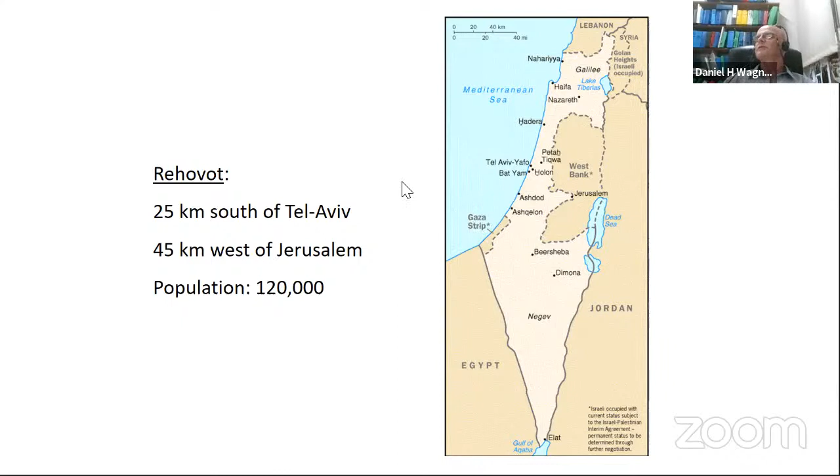The size of Israel is not very long. From Eilat at the extreme south to Nahariya at the north is a little less than 500 kilometers. And from the sea, where the Gaza Strip is, and the Dead Sea, so that's the Mediterranean Sea, there is about 100 kilometers. So we are very small. Sorry.

At the Weizmann, we have 5 faculties: math and physics, chemistry, and 2 faculties of biology, actually biochemistry and biology. And we have a science education institute as well. We are a small institute, 2,700. We are much smaller than the big universities in Israel. We are a research institute, and we don't have undergrads.

We have 250 professors, 600 engineers and technical staff, 1,200 students, among them close to 180 Indian students, actually. We have a big Indian population and also a big Chinese population. And as I said, we have only master and PhD. We don't have undergrads. 220 postdocs and 400 administrative employees. So that comes up to a total of slightly less than 3,000 people.

We are the only academic institution in Israel where everything is done in English. And the reason is, well, there are a few reasons, but we have many students and postdocs from abroad. And also English is the international language of science. So it's very convenient. The institute was founded in 1934. There were very few buildings, and we have grown quite extensively these days.

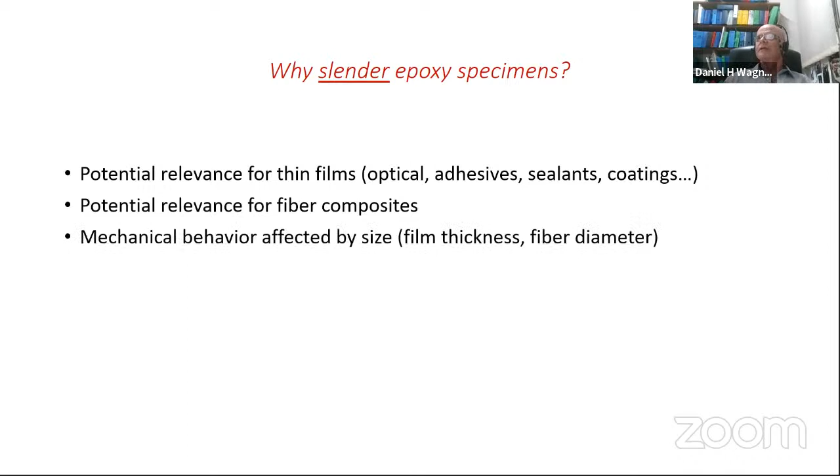The reason we are interested in slender specimens in general is that the mechanical behavior depends very much on the size of the specimens. Film thickness and fiber diameter are key parameters when measuring mechanical property. And also because it's difficult to make. And this is something I wanted to do for many years, to find the right student which is obstinate enough to be able to address this challenge of preparing very thin fibers and films of epoxy.

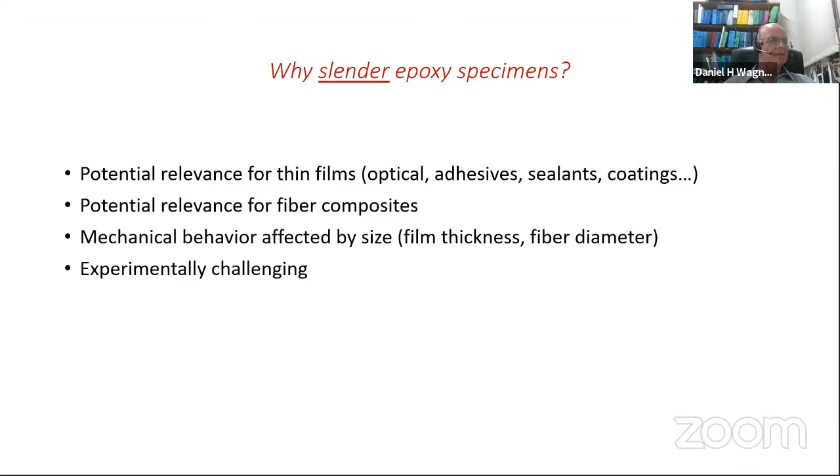Two weeks ago, exactly on the 3rd of November, there was a paper that was published on this issue. And there are very, very few papers published on this, maybe four. One of them being ours, which was published last year in the summer of 2019. And this paper by the Belgian group of De Clerck deals exactly with that, in situ observation of microscale ductility in a quasi-brittle bulk scale epoxy. So let me show you what I'm talking about.

The relevance to very thin areas of epoxy or polymers in general in a composite is indicated here. In this case, you have an interlayer between fibers. Those fibers, I think, are glass fibers, so they are of the order of 10 micron. And there is a very thin nanometer scale interface. And this interlayer is somewhere between 10 and 200 micron.

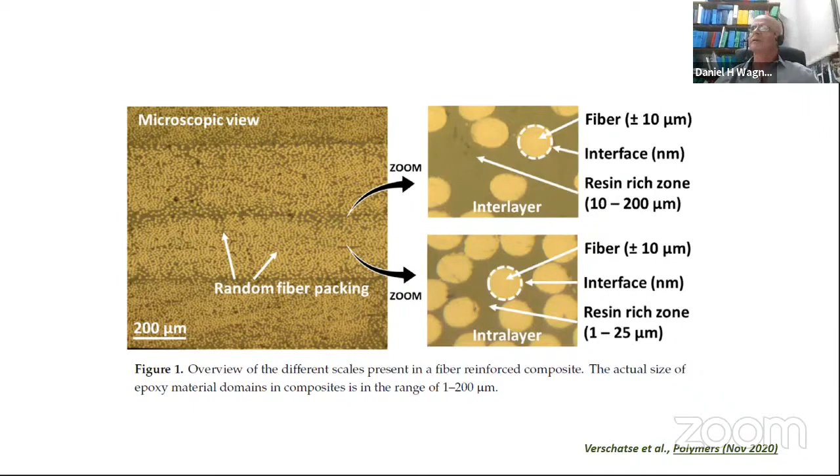But if you have a well-compacted composite, then this area, this zone is very thin, and here it's indicated, this is from that paper that I just mentioned, it's between 1 and 25 micron, but actually it goes much smaller. And at that kind of dimensions, you really have very strong size effects, as I showed.

You can easily calculate the layer thickness between fibers, which decreases as volume fraction increases. You can assume a hexagonal packing, and you have this standard geometrical expression here, which gives you the thickness between two fibers which are very close to each other, as a function of the fiber diameter, the overall volume fraction, and a numerical parameter.

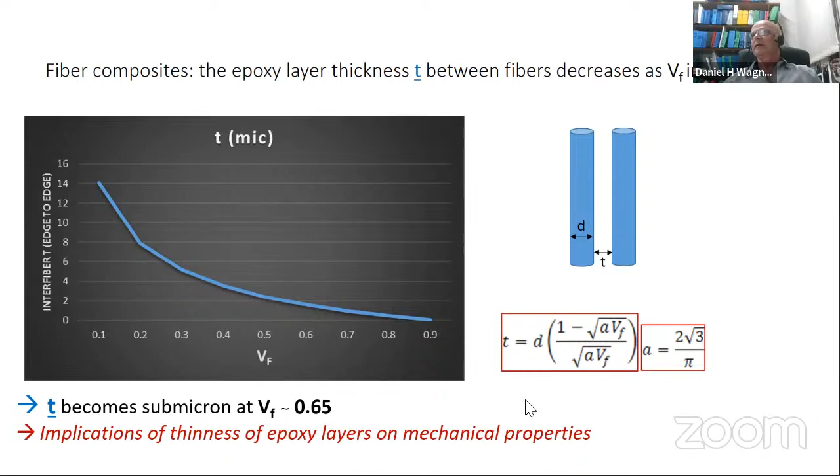And so, as you can see, the interfiber distance, edge to edge, is decreasing as you increase the volume fraction, as we imagine, and the thickness becomes submicron once you reach a volume fraction of about 65%. So submicron things become very interesting. And there are implications of the thinness of those epoxy layers, as I said, on the mechanical properties.

Now, how do you make them? That's a real experimental challenge. And there are extremely few attempts in the literature to make those. Bodo Fiedler made some in 2007, then in Germany, then Gillespie in the States a few years ago, and Bodo Fiedler again also.

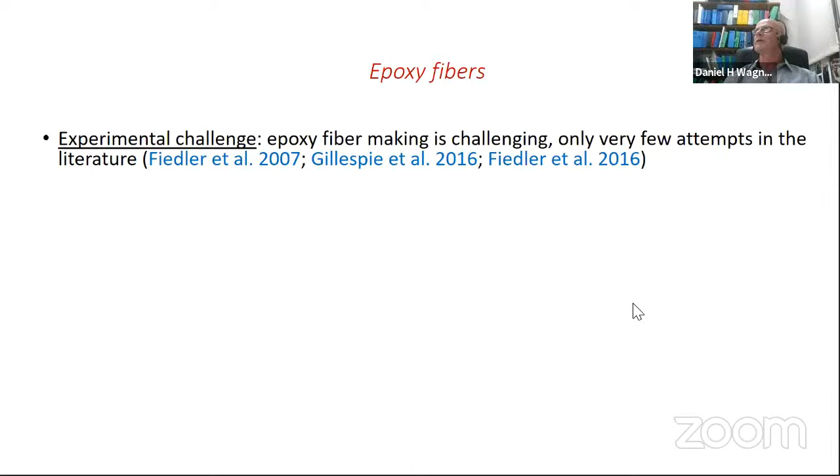And we have published a paper where we have used Epon resin, which is a standard epoxy resin, DGEBA, diglycidyl ether of bisphenol A, and its hardener, which is a polyetheramine. And the fiber was prepared by hot drawing and curing simultaneously, roughly following this literature here. It's not easy. So how do we do it?

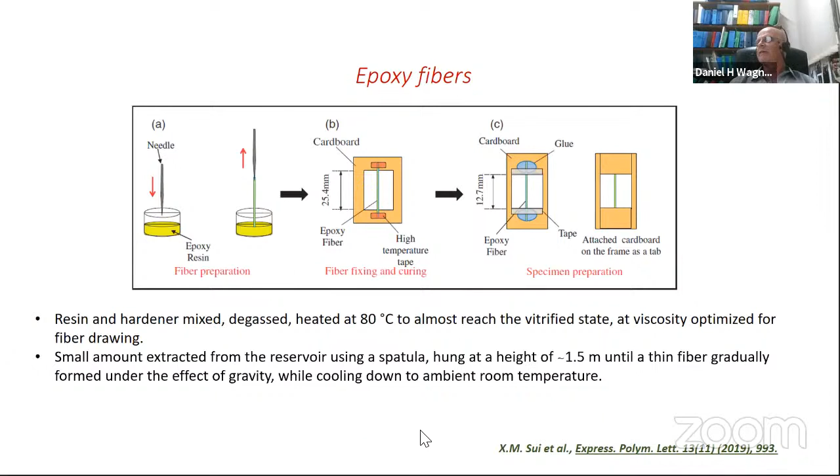We mix the resin with the hardener, we degas, and we heat at 80 degrees in this case to almost reach the vitrified state, and the viscosity is optimized for fiber drawing. That's where you then extract a small amount from this reservoir here using a spatula or a needle, and you hang this at a height of about 1.5 meters in our case, until a thin fiber gradually forms. And this is just because of gravity, and it cools down to ambient room temperature very slowly.

So this is what we do here, and then after that, once it's cured, you fix the fiber on a cardboard, which makes it ready for testing with a tensile testing machine. The final fiber diameter is determined empirically or semi-empirically by modifying the amount and the viscosity. You're playing around with those parameters at the tip of the spatula.

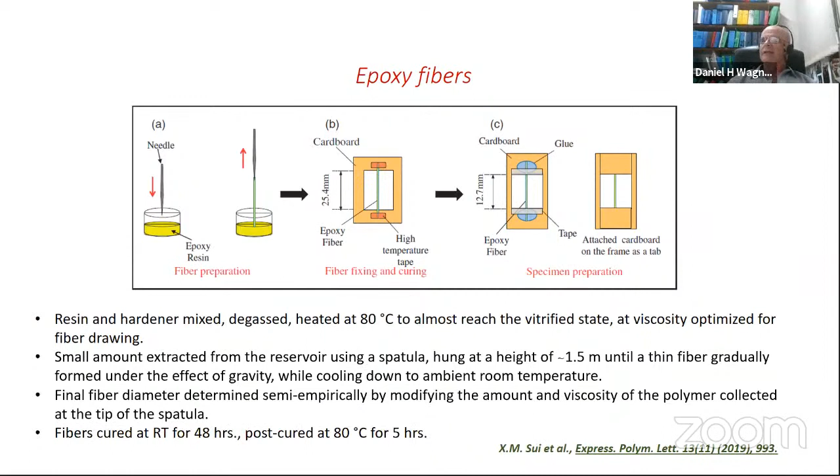The fibers are cured at room temperature for 48 hours and then post-cured at 80 degrees for 5 hours. So this is a technical thing. It's critical in this case, because if you don't follow very carefully something like this, you are unable to make epoxy fibers.

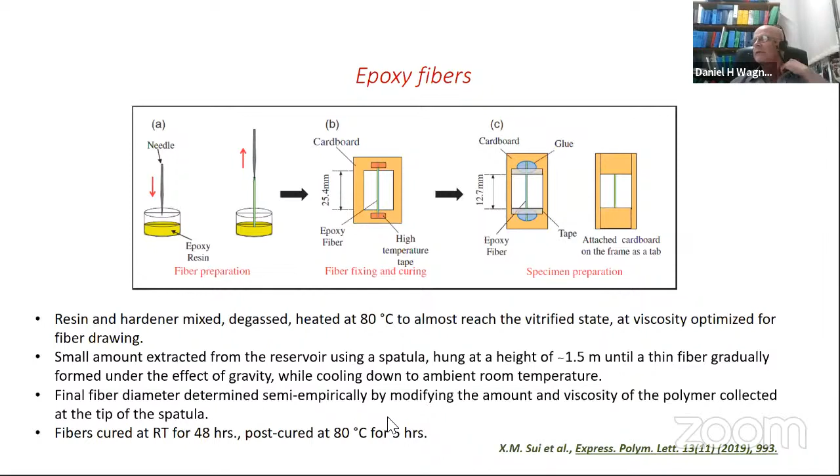This refers to the paper that we published last year, and I will refer to it constantly during this lecture. The fiber looks very good. Once you are able to make it properly, it looks very clean, smooth, high quality. There are no surface defects or apparent surface defects. The material is clear and transparent, and the cross-section is circular, and you can cut it later into smaller specimens for mechanical testing. And this is what I want to show you now.

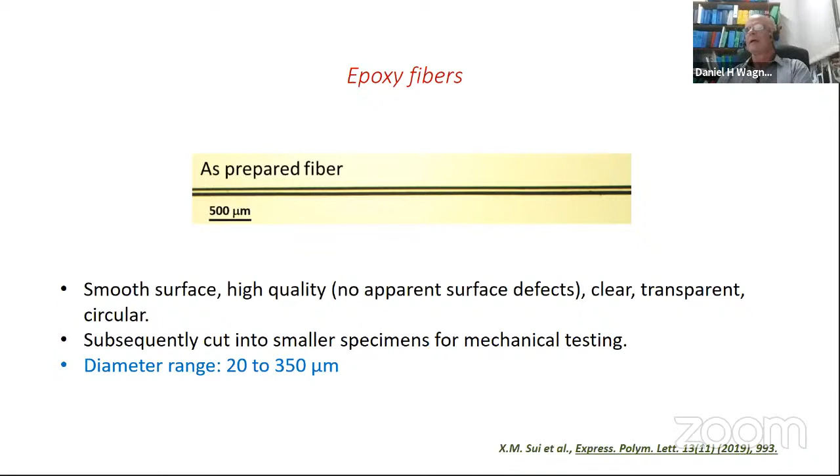The range of diameter that we were able to prepare in this first set last year, or 2 years ago, was between 20 and 350 micron, which is smaller than anything else that exists in the literature, including those other papers. Let's talk about epoxy now. Bulk epoxy is an archetype of amorphous isotropic polymer, and it's typically brittle. When stressed under tensile force, it doesn't resist crack.

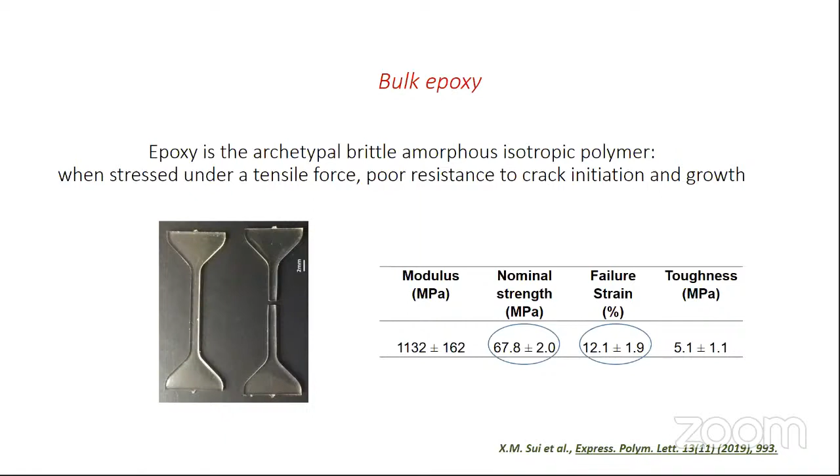Professor, sorry to interrupt. Can you please adjust your mic because we are losing your voice sometimes. Maybe the mic is too far away from you. Oh, it's stuck to me, so I don't know. All right. So can you hear me now? Yeah, this is much better. Oh, thank you. Then I'll talk stronger, louder.

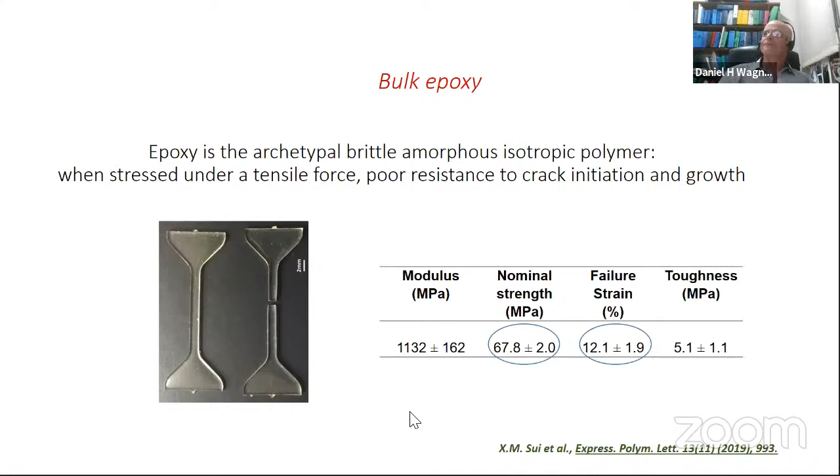Under tensile force, there is poor resistance to crack initiation. This is epoxy. This is how the break looks like. The nominal strength typically is around 70 megapascal, while the failure strain, you can play with it, but it's usually somewhere between 6 and 12%. And the toughness here is 5.1, but that's less relevant at this point. The modulus is usually 1.1, 1.2 gigapascal. But the 70 megapascal is important, and 12% failure strain is also important to remember. So this is a typical failure of epoxy.

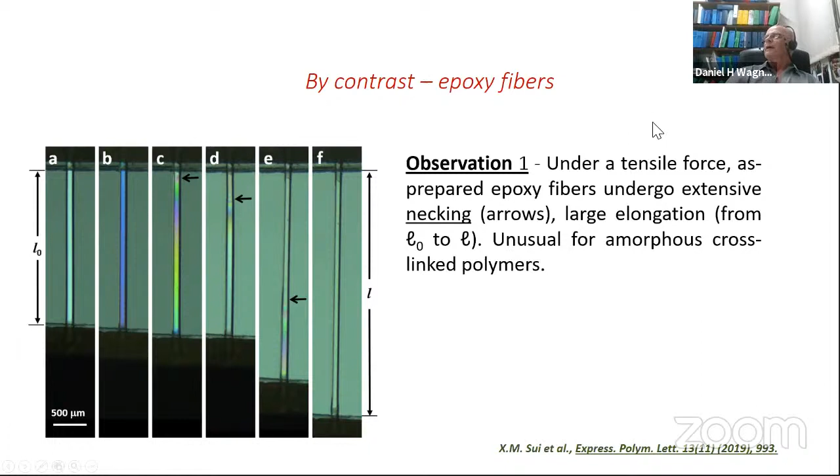Now, if you test the epoxy fibers, things look different. Once you increase the stress or the strain on the epoxy fiber, where the arrow is, you generate necking. This in itself is amazing. Epoxy doesn't neck like a metal or a thermoplastic material such as polypropylene. There is no necking usually in epoxy, so this was a big surprise. The elongation is very large, and necking is unusual for amorphous crosslinked polymer, and this is how it looks under the microscope. The necking starts here, then propagates. We just cut the ends so that you can see this necking picture.

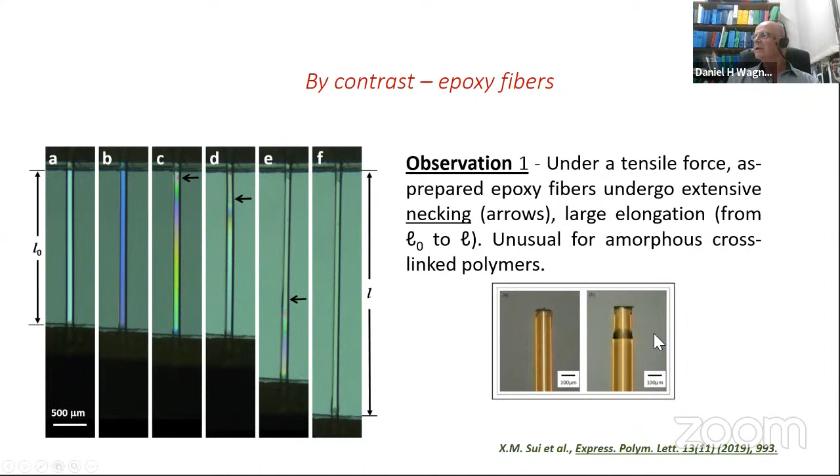If you stop the test here, cut a piece and retest this necked fiber, it goes according to the blue line, which goes to the sky, really: 250, 280, and sometimes more megapascal. So this is a huge surprise. Let me show you this in a table. This is the value for bulk, and for fibers above 120 micron in diameter. The strength then increases from 67 to 79 down to 80 micron, down to 40 micron you reach 112 megapascal, and below 40 micron you have 134 megapascal, which is amazing. There are other data here, but it's not necessary to talk about them right now.

If we test the necked fiber, which was in blue on the previous slide, what you get is even higher. You go up to a strength of 227 on average for necked fiber below 40 microns. So this is a very, very large value. You can also calculate true strength by dividing by the evolving, true cross-section, and get higher values.

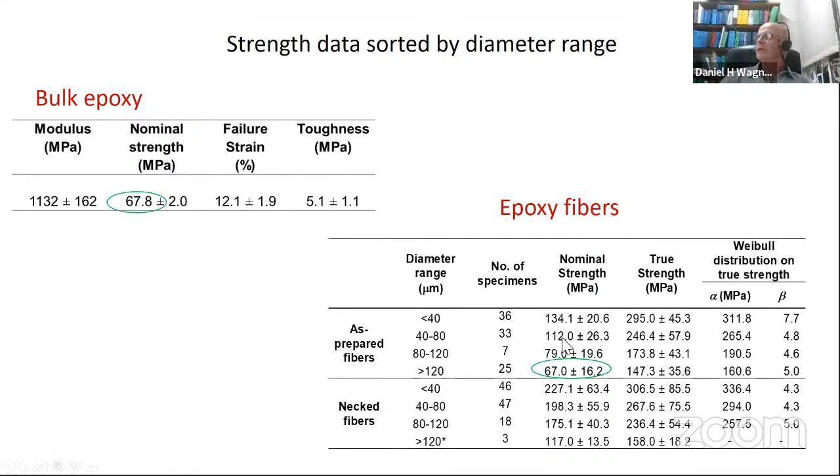And the question is, what's the origin of this size effect on strength? Because in none of the papers that were published before, the 3 or 4 papers that were published earlier, nobody addressed the question of, what's the physics behind this thing? What's going on? Why is there such a huge size effect? And so we wanted to address this.

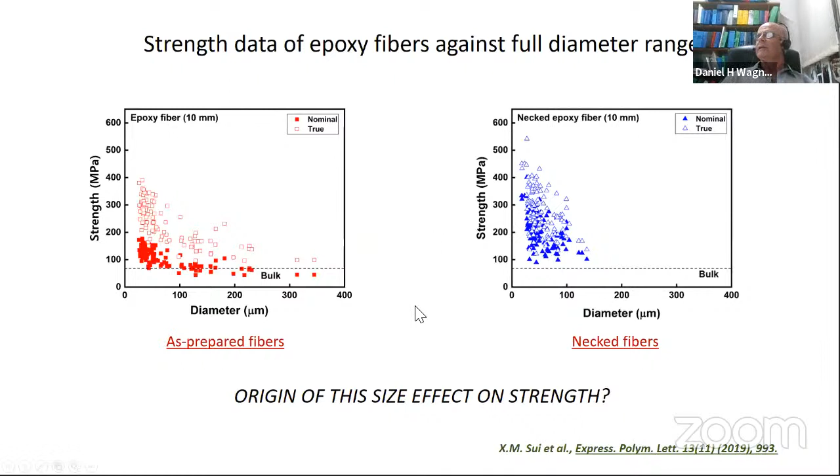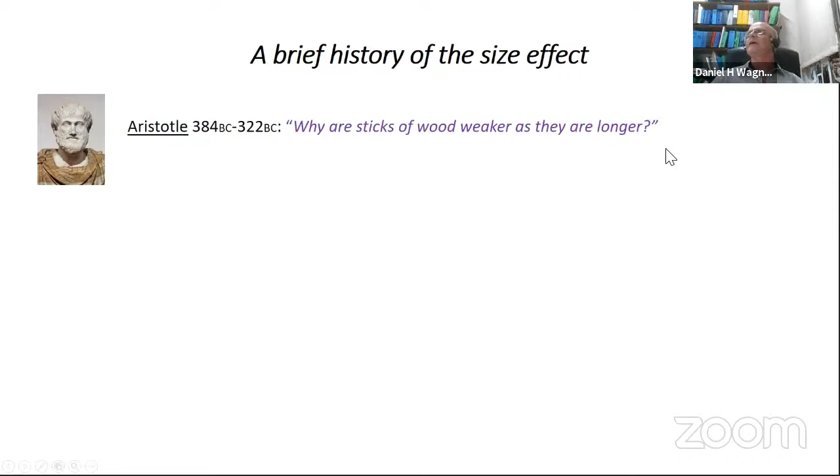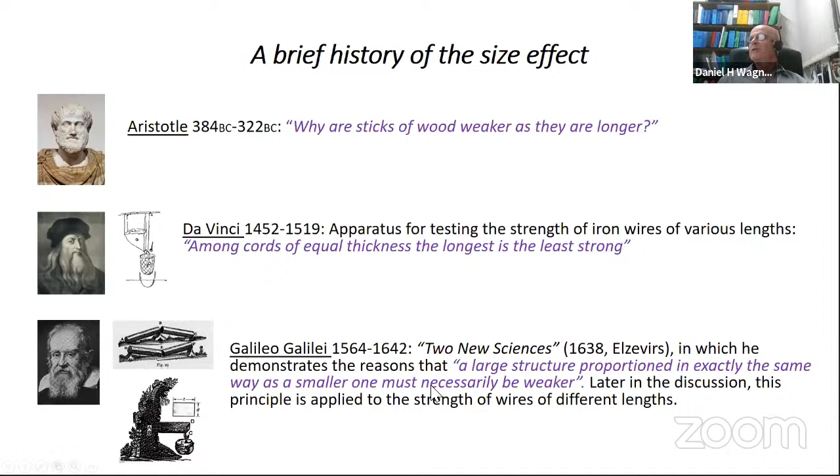Galilei published Two New Sciences, and I warmly recommend to read this book because it's amazing. The discussion between the protagonists there is really fascinating. He demonstrated the reason that a large structure proportioned in exactly the same way as a smaller one must necessarily be weaker. And so he did that with wires with different lengths as well.

The most surprising scientist who studied this size effect is Mariotte, the well-known Mariotte who did research on gases. The Boyle-Mariotte study is well known, and he states that a long rope and a short rope always support the same weight, unless that in a long rope, and that's the key, there may happen to be some faulty place in which it would break sooner than in a shorter. So he addressed the reason why the size effect occurred.

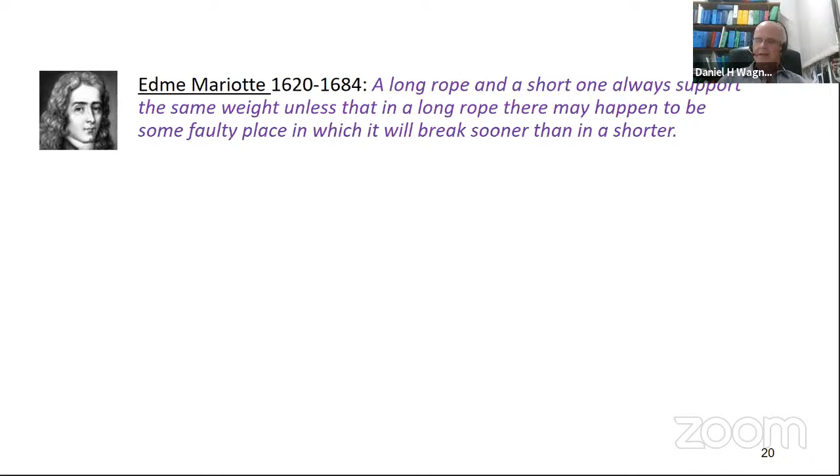And then came Griffith, of course, which was the so-called first, but actually Mariotte did it before, to relate the presence of flaws and the specimen geometry with strength. He stated that the weakness of isotropic solids is due to the presence of discontinuities or flaws. So he really assumed that there are always flaws in materials.

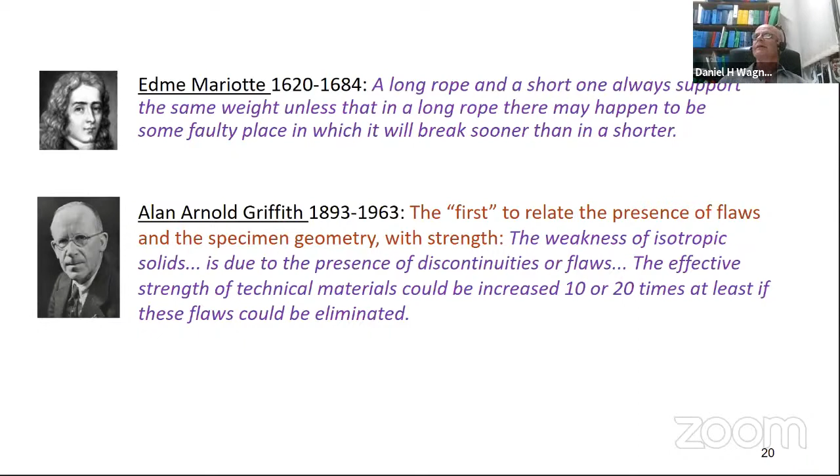And so he concluded that the effective strength of technical materials could be increased 10 or 20 times at least if the flaws could be eliminated. Of course, this is well known today. And so this is a first address of the size effect. And this is from the original paper of Griffith, 1920.

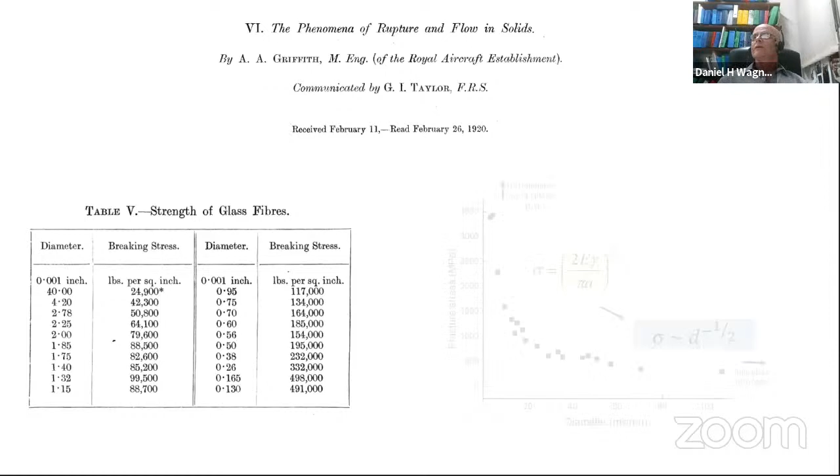So I took the data and I plotted them. I transformed the units to units I know better, which are micron and megapascal. And this is what I got. The strength is proportional to the diameter, looking at diameter, not length, raised to the power minus 1/2. This is what Griffith's expression or model leads to. And so we have bulk glass 170 megapascal or less, and the extrapolation goes up to the sky for glass.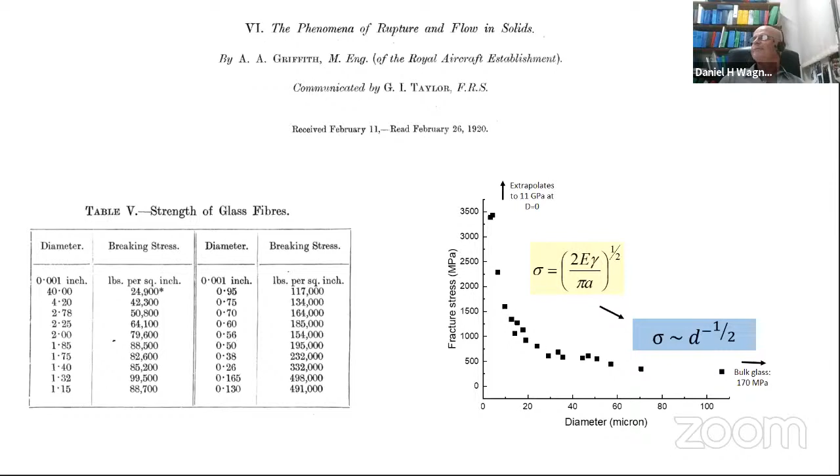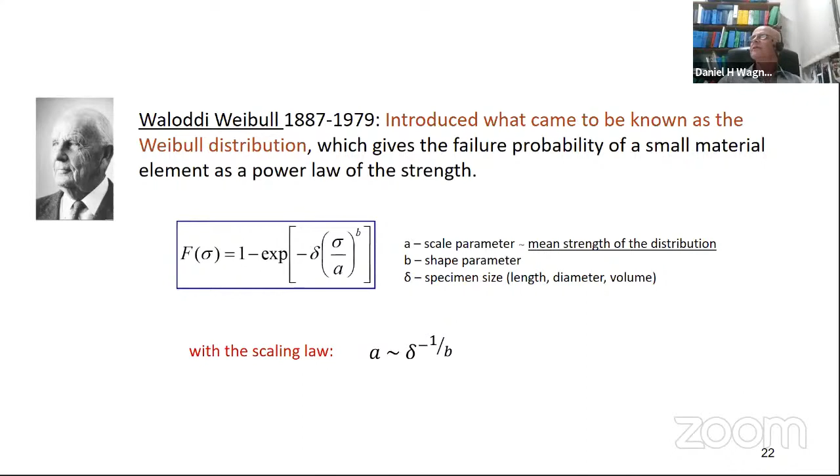Then we have Weibull, who introduced a probability distribution and the size effect. And the size effect in this case gives the scaling law that goes as d to the minus 1 over b, and b is a shape parameter, and a is a scale parameter, which actually is nothing else than the mean strength of the distribution. So the schemes are empirical.

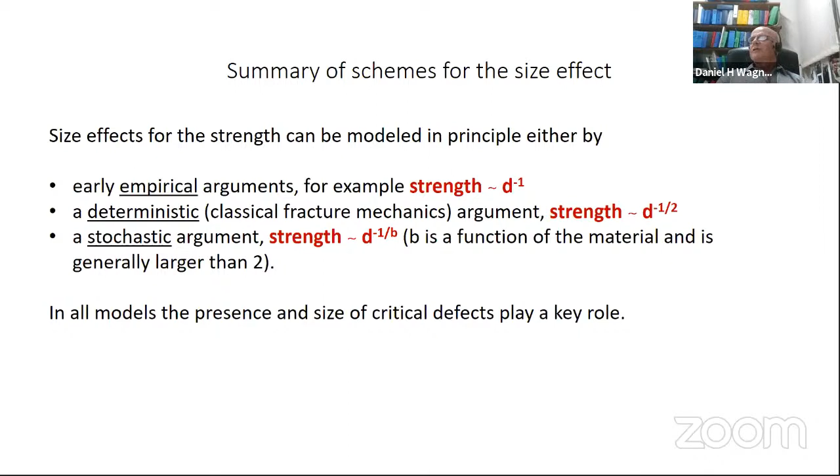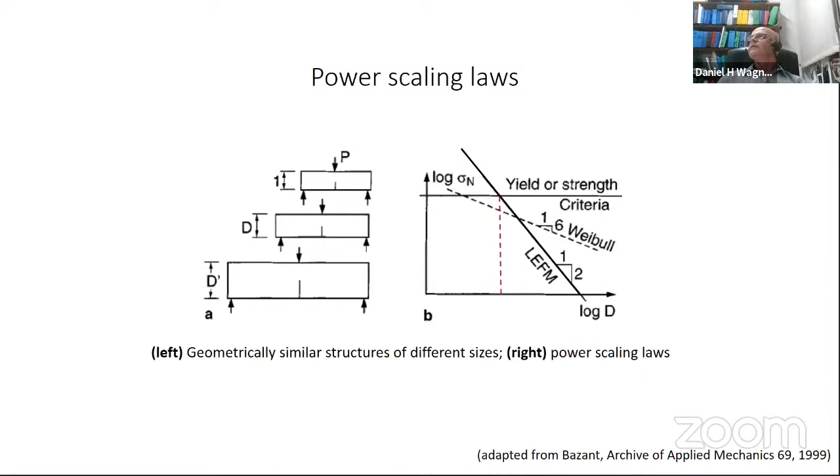I didn't mention that, but some people also derived the strength as being proportional to 1 over the diameter. It's deterministic. This is the classical fracture mechanics argument. And then there is stochastic, where b is a function of the material, generally larger than 2, where 2 is the fracture mechanics exponent, or 1/2. In all the models, the presence and the size of critical defects plays a role, of course, and we have these scaling laws here, as you can see, but that doesn't give us much novelty here.

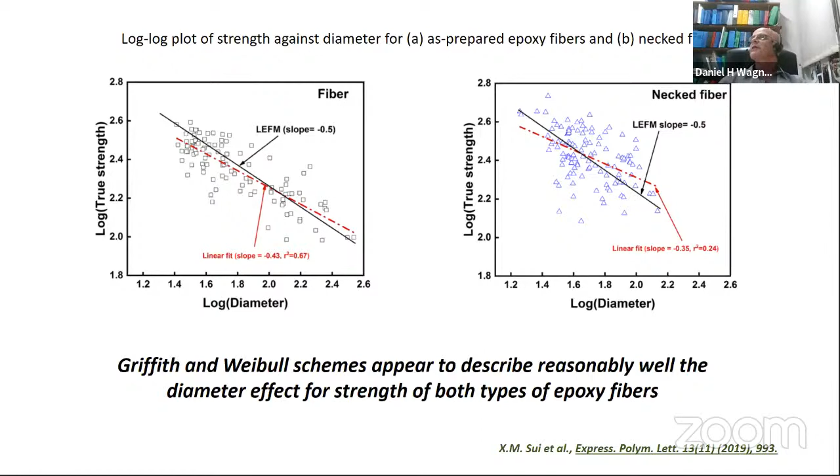So now we conclude using our data that the Griffith and the Weibull scheme both appear to describe reasonably well the diameter dependence of the strength of both types of epoxy fibers. You see the slope is 1/2 for the LEFM, and there is quite a lot of spread in there, especially for the necked fiber, but the slope is still going through in a reasonable way for the fiber.

The Weibull distribution gives you two plots, on the left for as-prepared fibers and on the right for the necked fibers, and the Weibull model fits quite well. It's been sorted in 4 diameter ranges, and the effect of diameter on the strength, as expected, appears as a shift of the data.

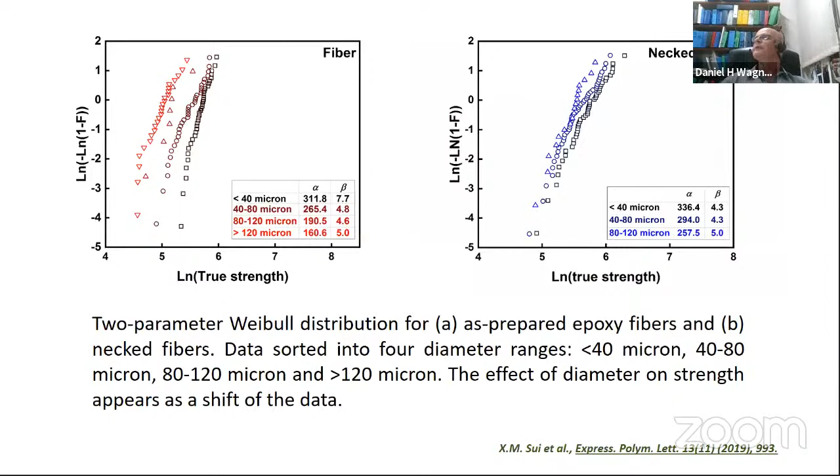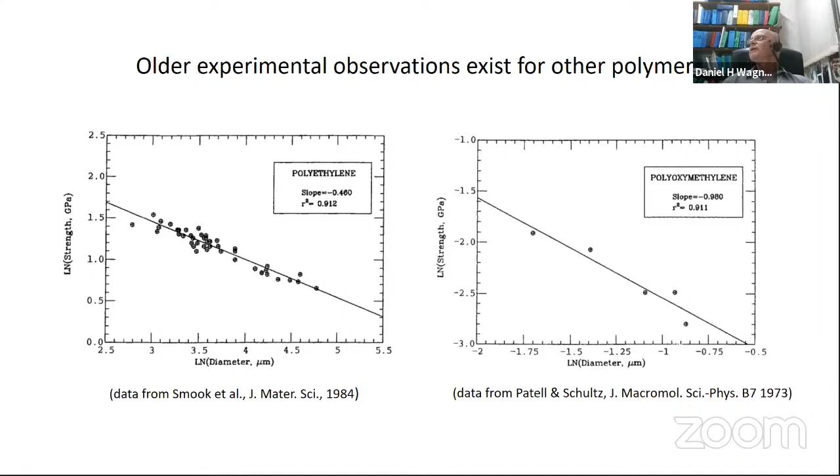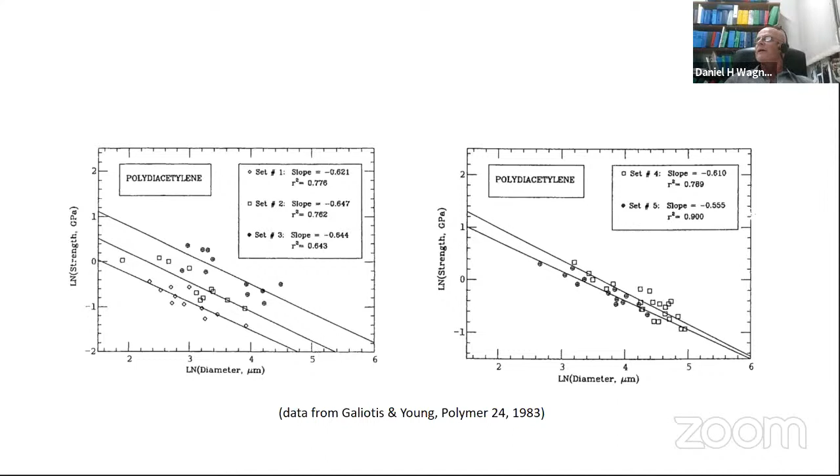Is there anything else in the literature regarding this? Well, if you dig deep enough, you find things for polymers. You see, 1984, there is polyethylene. The strength is plotted as a function of diameter. And for polyoxymethylene, you have also very few data points, but there is a slope of -1/2 for polyethylene, and -0.9 for polyoxymethylene, that's not very good in terms of the models. And then we have polydiacetylene of various brands, again in the 1980s. So things exist.

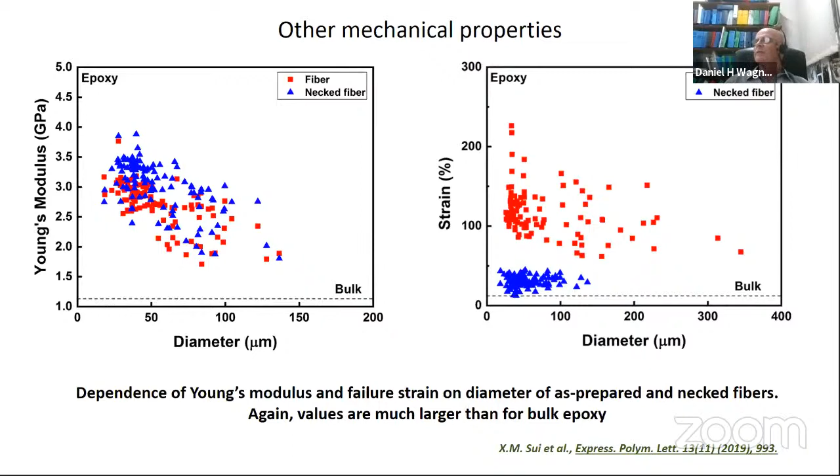And we have other properties that we've measured, and they also have a size effect. Young's modulus has a size effect, and it's way above the bulk value of epoxy Young's modulus, 3 times or something like that on average. The strain is also much larger, but we know that because of the yielding. The yielding is totally unusual for epoxy. So there is a huge difference between bulk epoxy as we know it and those necked fibers, or those thin fibers.

Toughness, being simply here the area under the stress-strain curve, is also having a size effect. There's a dependence on diameter for both as-prepared and necked fibers. So we have all this data.

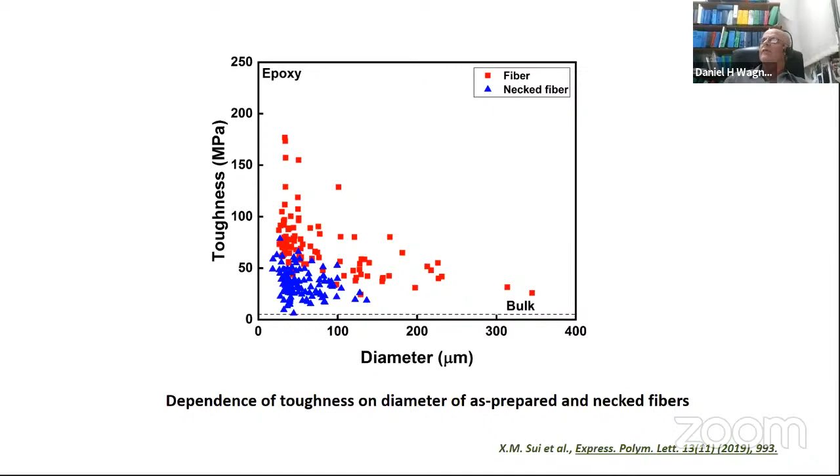There is also another set of data, which is ours actually, but it's not with epoxy. It's electrospun polymethyl methacrylate fibers. And again, we have an effect of the diameter on Young's modulus, on the strength, and on tensile toughness. This is work we did about 10 years ago, and we observed a size effect for very thin nanometer-size electrospun PMMA fibers, not epoxy.

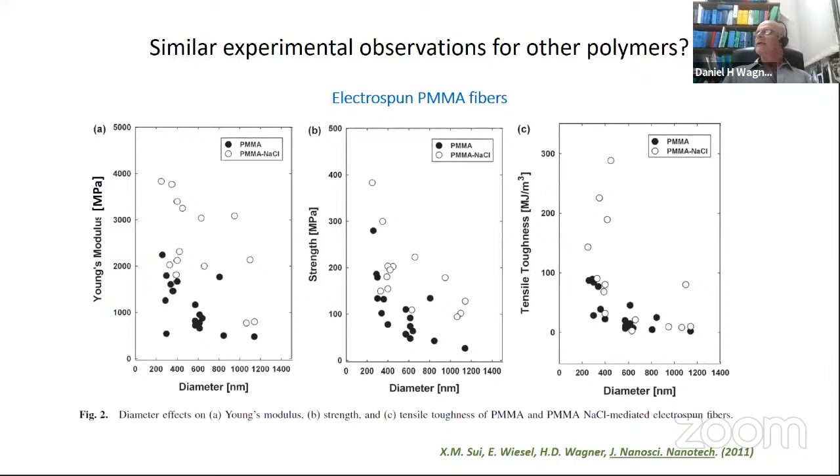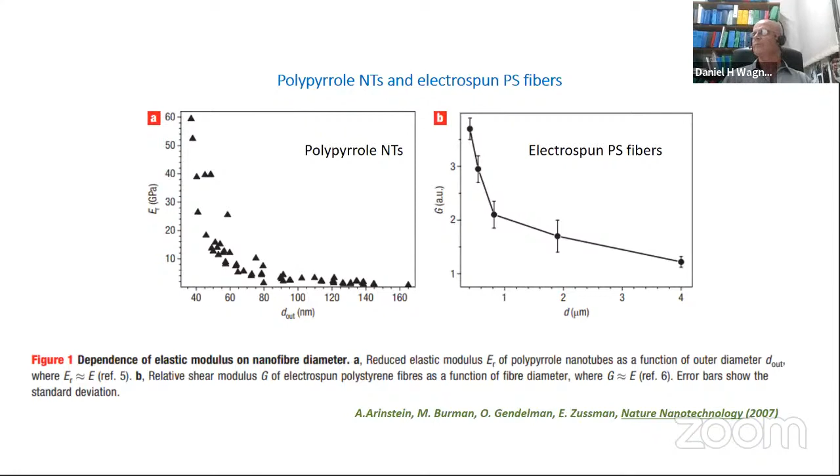And then polypyrrole nanotubes and electrospun polystyrene fibers also show a size effect, in the range of microns and submicrons for the polystyrene fibers, and in the nanometer range for polypyrrole. So this is really a universally observed phenomenon.

In the few previously published works on epoxies that I mentioned earlier, they also observed necking and plasticity. But the authors attempted to avoid these conditions and to minimize plasticity effects so that they would deal only with the brittle failure mode, probably because they couldn't explain it. So they tried to avoid talking about this for the size effect.

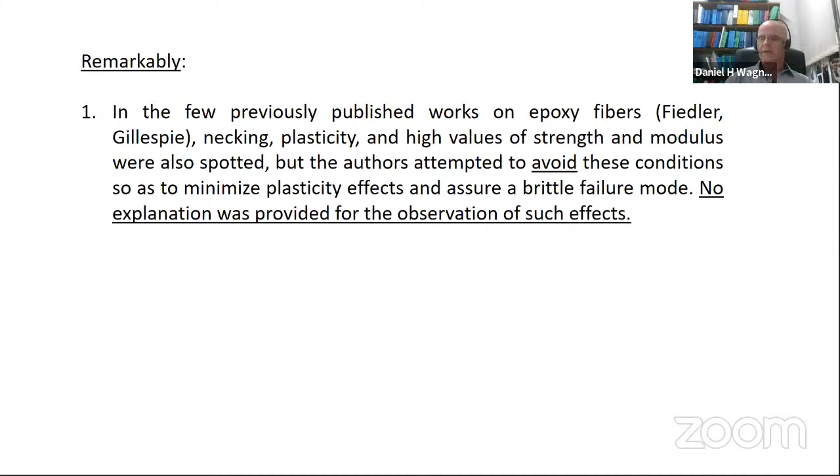There is another really amazing observation, both for our data and the previous data. Usually materials never reach their theoretical strengths. Maybe carbon nanotubes, diamond, or single crystals reach theoretical values, but for most materials, you never reach the theoretical strength of solids. What is the theoretical strength of a solid? The rule of thumb is: take the Young's modulus, divide by 10. It's rarely witnessed.

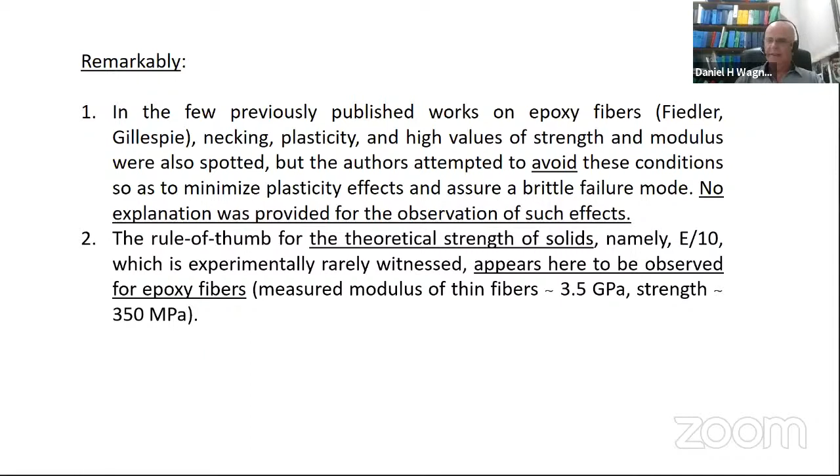And here it works. It's observed for epoxy fibers, because the modulus is on the order of 3.5 gigapascal and the strength is 350 megapascal. So you have exactly E divided by 10, which is really impressive.

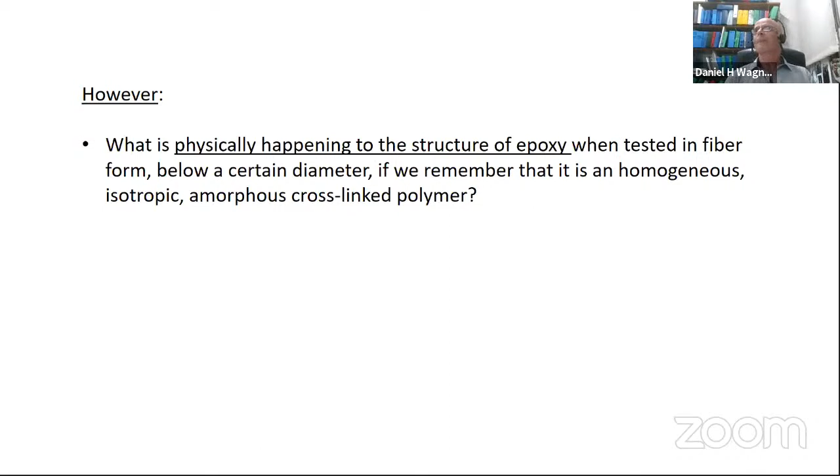The question I'm asking once again is: what's going on? What's physically happening to the structure of epoxy, which is a cross-linked material, when it's tested in fiber form below a certain diameter, especially since it's a homogeneous, isotropic, amorphous, cross-linked polymer?

We then did WAXS, wide-angle X-ray scattering, and we got the first evidence that these highly cross-linked necked epoxy fibers do exhibit macromolecular anisotropy, partial reorientation of the molecules, and that likely explains the observed mechanical characteristics.

This is something that's never really been done for amorphous cross-linked polymers, because in a thermoplastic you can imagine that the molecules are easily reoriented when straining the specimens. But with epoxy, which is highly cross-linked, and this one is highly cross-linked, you don't expect that.

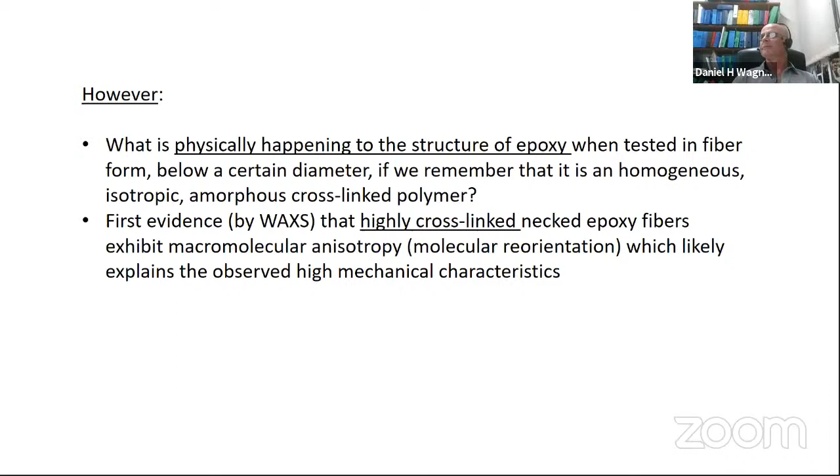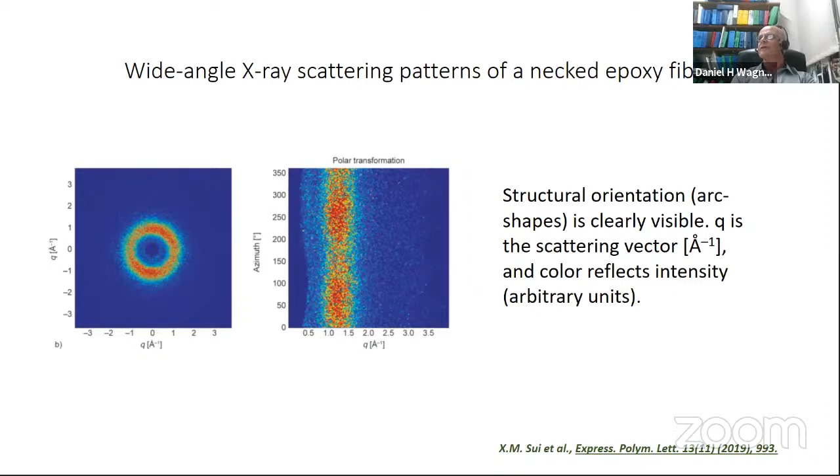And we did some calculations using the orientation parameter, the Hermans-Platzek orientation parameters, which you can calculate from the WAXS data for the necked fiber, and it's 0.23, which demonstrates that it's not a very high reorientation, but it's not negligible. If you had a value of 1, you would have full alignment with the fiber axis. And of course, you cannot have that in epoxy, which is cross-linked. But nevertheless, we get molecular orientation.

We are currently busy doing many more tests, both mechanical and spectroscopic with WAXS and other techniques. And we are also using epoxy films and fibers, but the films usually show no preferred orientation, and the as-prepared fibers do not show the preferred orientation.

So really, that means what? That means that the size effect that we observe is different for the as-prepared fiber. It exists because there is a size effect, but it's different than the size effect that we observe with the necked fibers, in which you definitely have some reorientation.

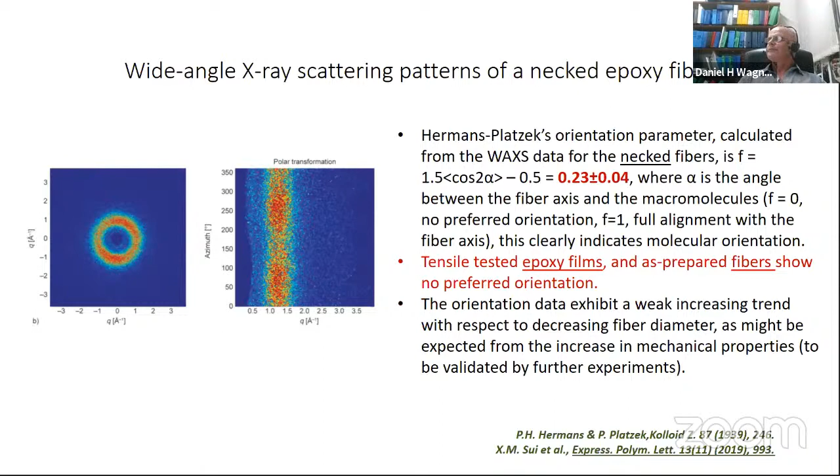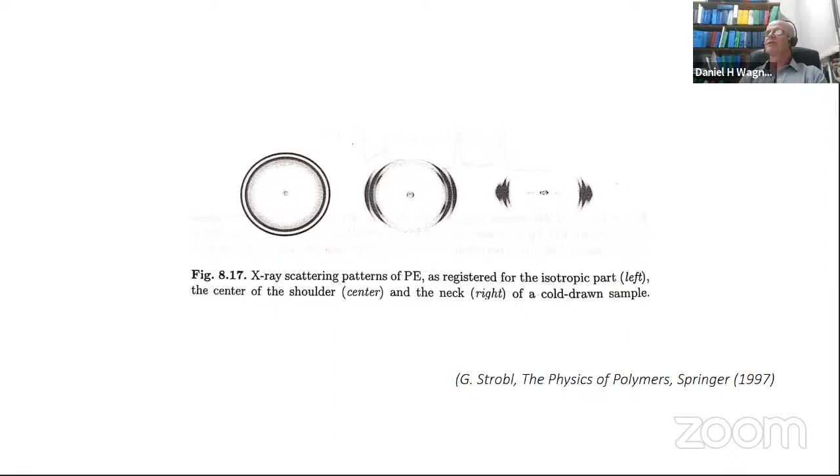And if you have a full reorientation, at the right picture, you get a very clear picture of reorientation in the neck of a cold drawn polyethylene sample. So we see a little bit of that. The picture we have is more the picture that appears at the center of this figure here. And so we have partial reorientation of epoxy molecules or structure.

So defects, in fact, cannot explain the extensive plastic deformation that we see in the experiments, or justify size effect in Young's modulus, which is an elastic property. A question we have is, what's the physical structural origin of the characteristic diameter? Is there any way we can predict the value of that characteristic diameter, below which the mechanical properties of epoxy fibers start increasing very significantly? So what's the physics?

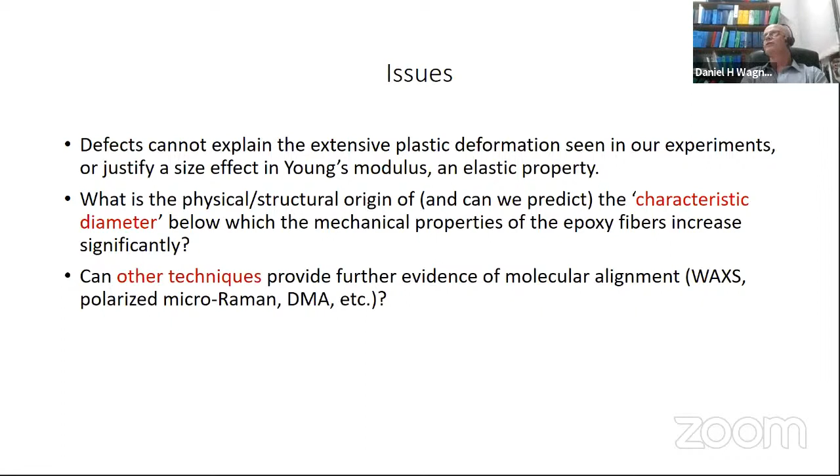Can other techniques provide further evidence of these alignments? We are doing right now polarized micro-Raman, DMA, and SNOM, which is an optical technique, which we are using to try to find evidence of molecular alignment, and what kind of mechanism can be responsible for this molecular reorientation in an amorphous cross-linked polymer.

And what we are doing right now, which is very exciting, I have a PhD student working full-time on this, is electrospun epoxy fibers. It's difficult to prepare, but we have them. He's been working very hard on this, and what this will give us is the submicron range of diameter, and we are down to about half a micron now, so 500 nanometers at this point, using this electrospinning technique that he has developed. So that is very exciting, and we expect to have results very soon.

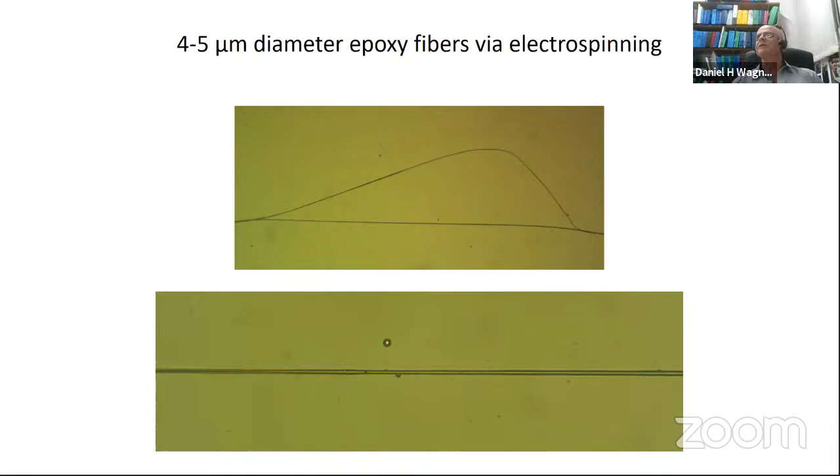This is the first electrospun fibers of epoxy that we obtained several months ago, and we are very hopeful that these will also show very strong size effects, diameter effects. If you want further info, at least on the micron-sized fibers, this appears in the paper that we wrote last year.

Mayank Tiwari was a student coming from India. He was with us for 6 months or 8 months or something like that, and he came from IIT, I think, if I remember right.